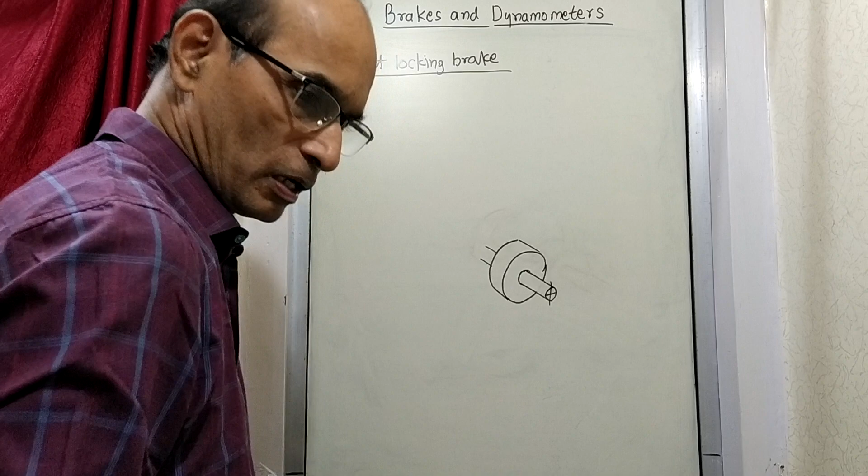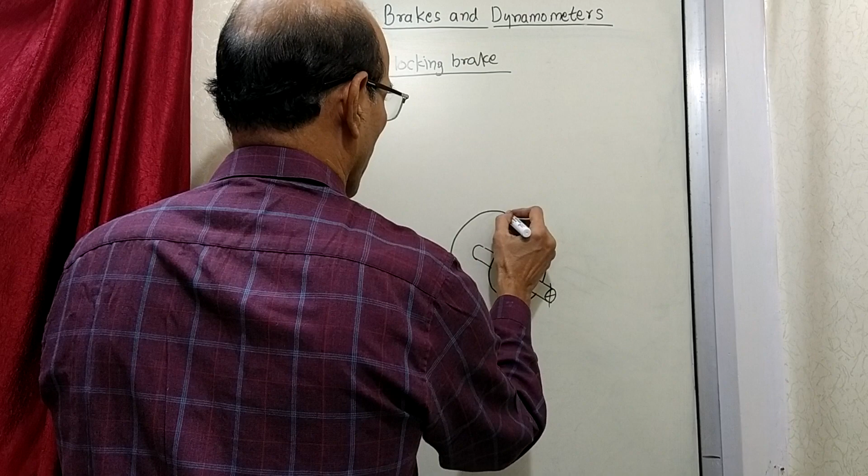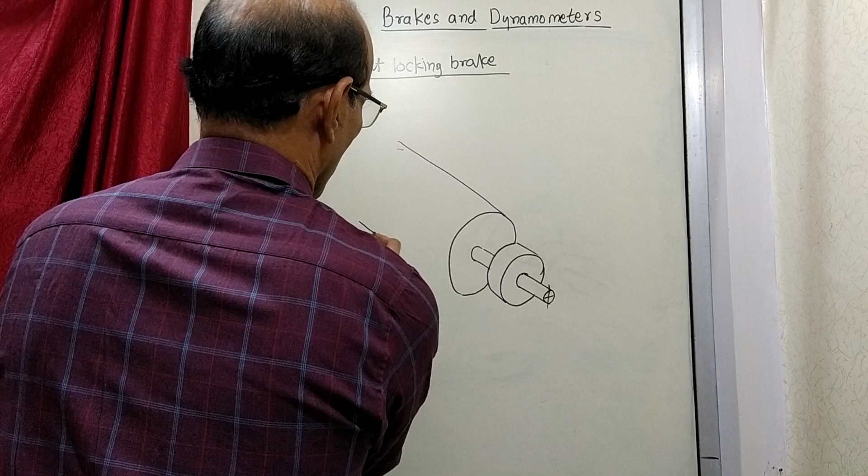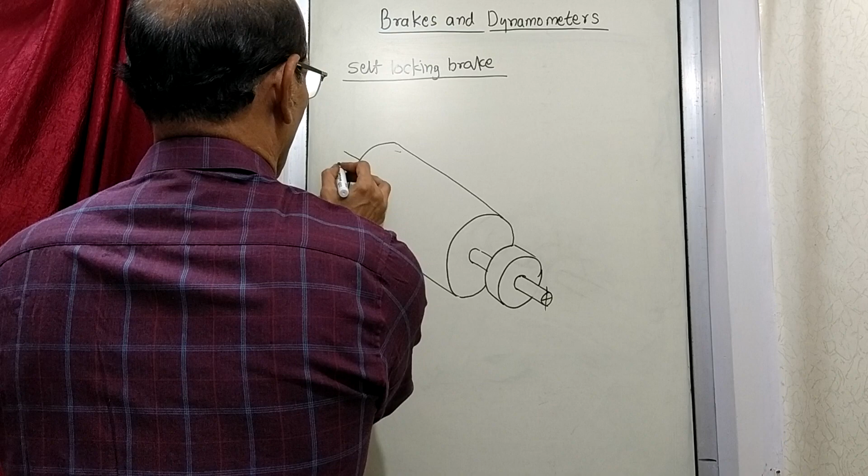There is a drum, and after this drum we are going to draw a figure like this. Some support is here, and on this side here there is a shoe.

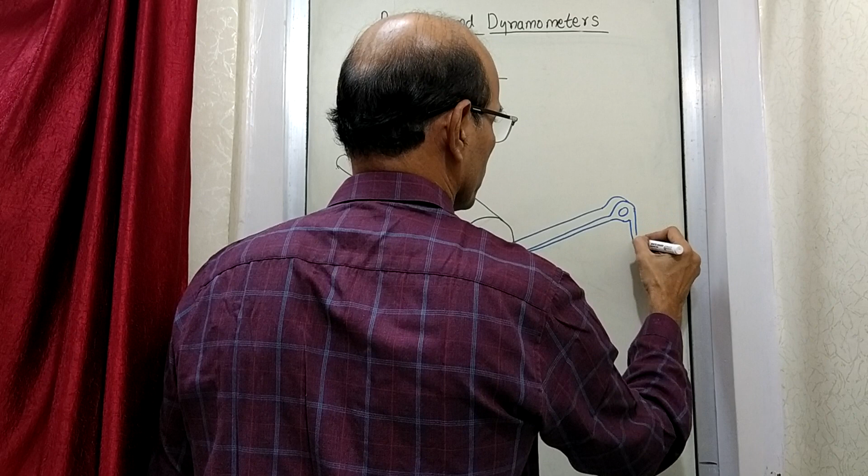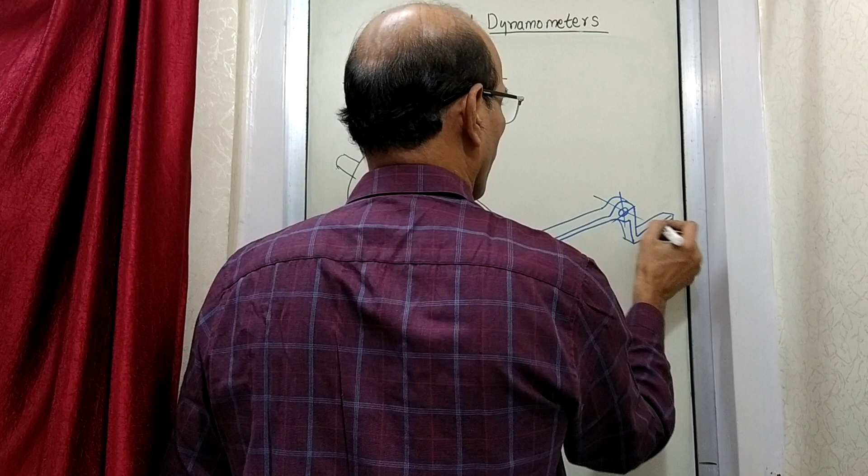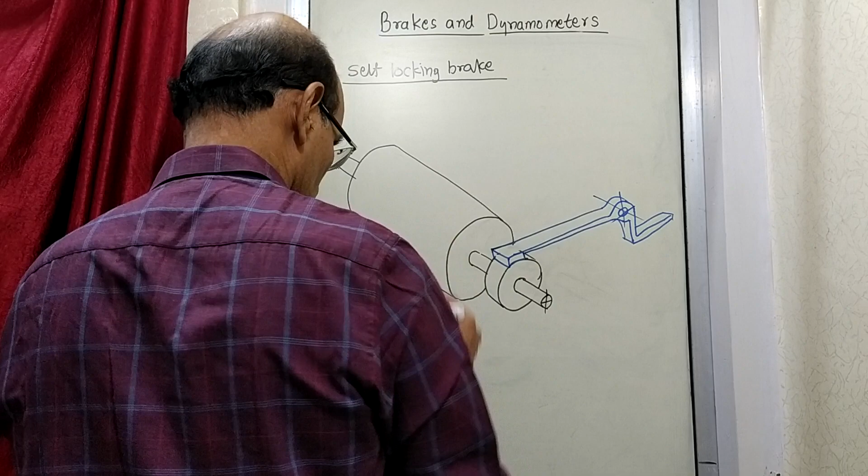So what you now see is here there is a drum, and on this drum there is a rope that is wound here.

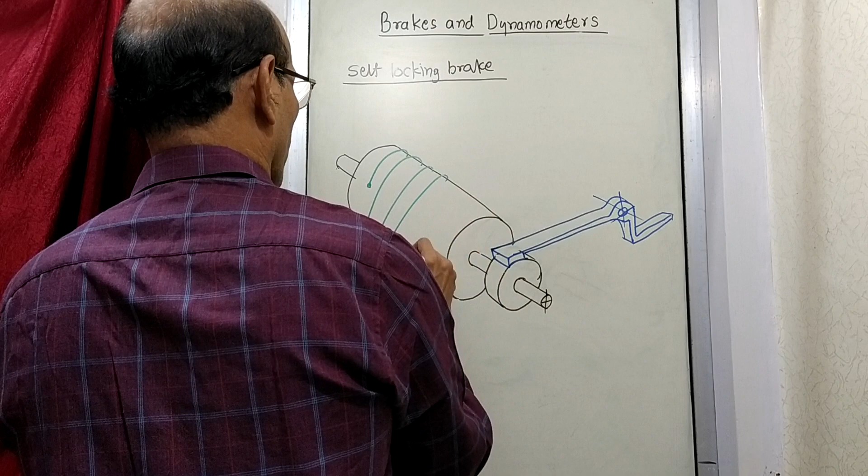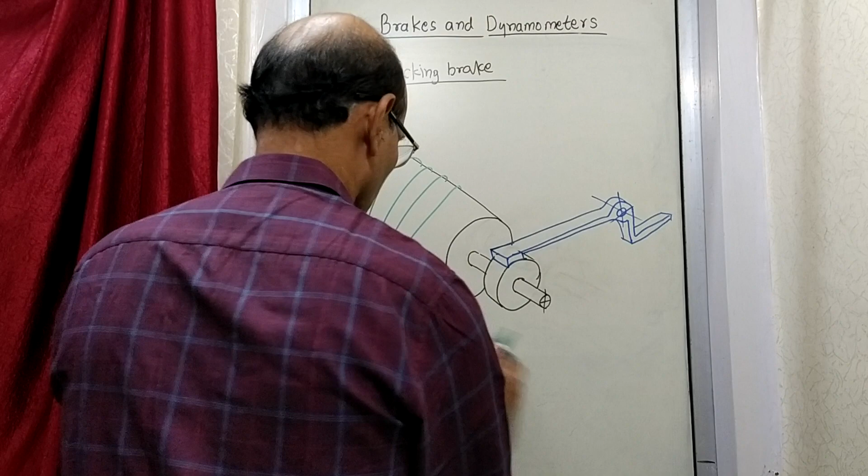And this place here, there is some object. Then this is supported somewhere - it has to be supported. So I am just showing a support like this, just as a convention.

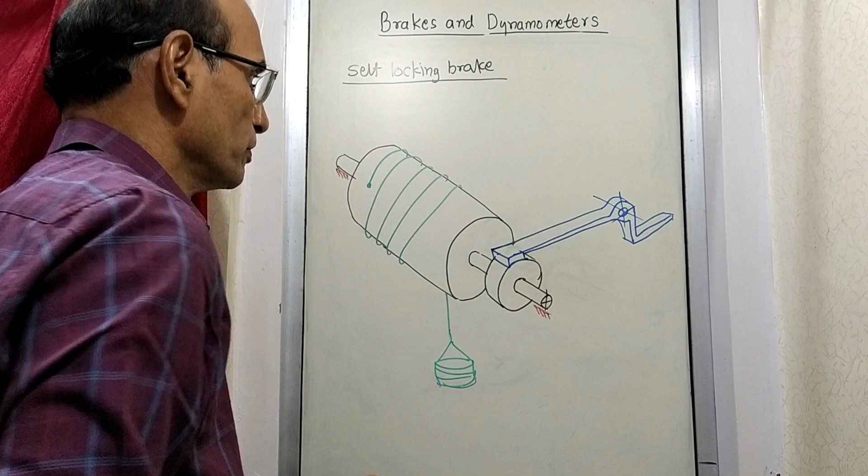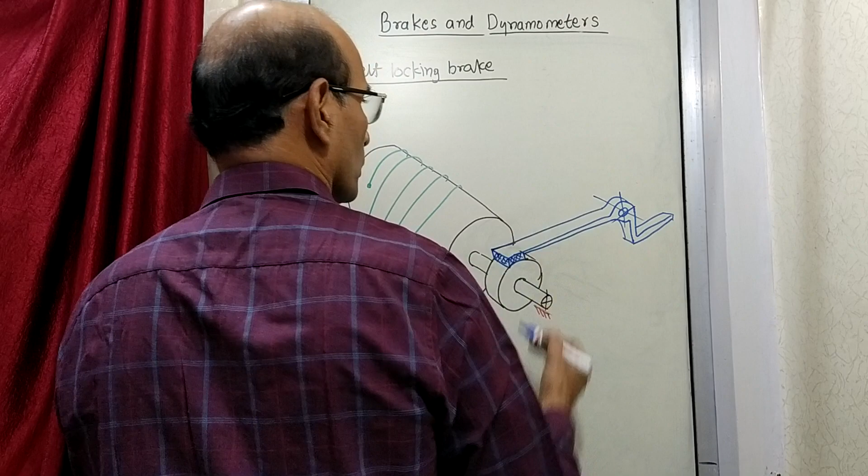This is a brake shoe. Just a simple schematic arrangement, you can say.

So now what you observe here is that there is a drum. On this drum there is a rope wound, and at the end of the rope there is some weight.

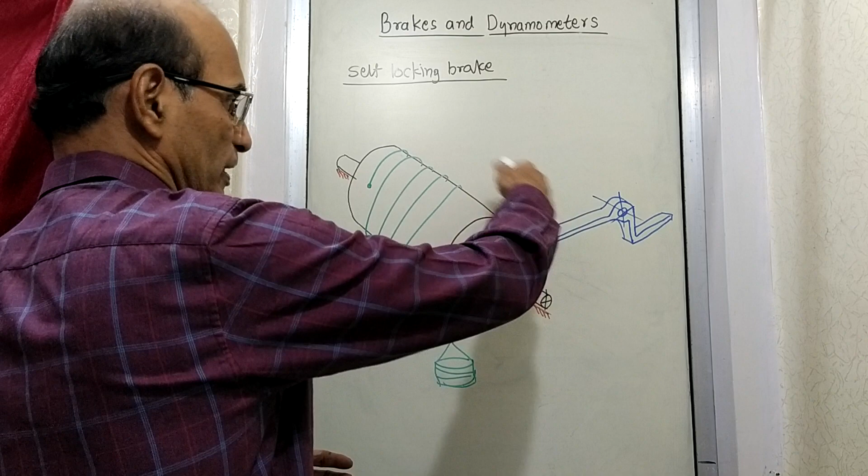Now imagine that you want to lift this weight up. So what is done is, by some method we are rotating like this, and as a result of rotation the drum is rotating this way and the weight is lifted up.

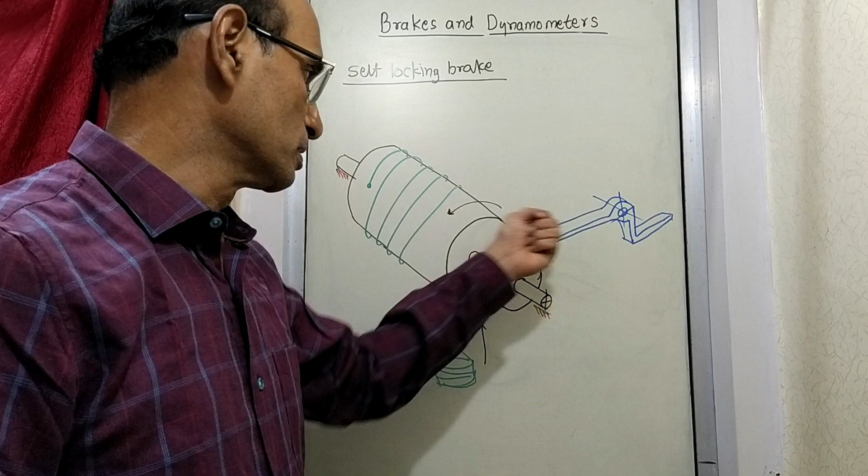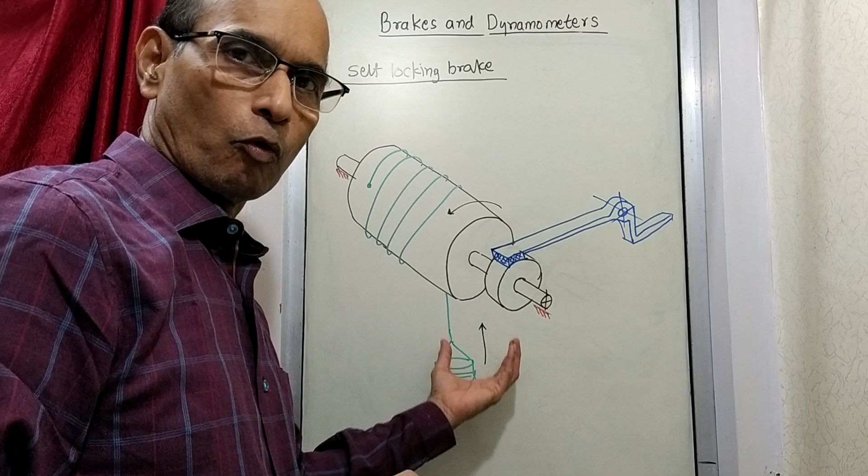Now suppose whatever is the method or handle you are rotating, suppose for some reason you release your hand, then what will happen? The weight, because the weight is on this side, will start falling down on its own, and this will start rotating in the backward direction. So weight will come down, this will go like this.

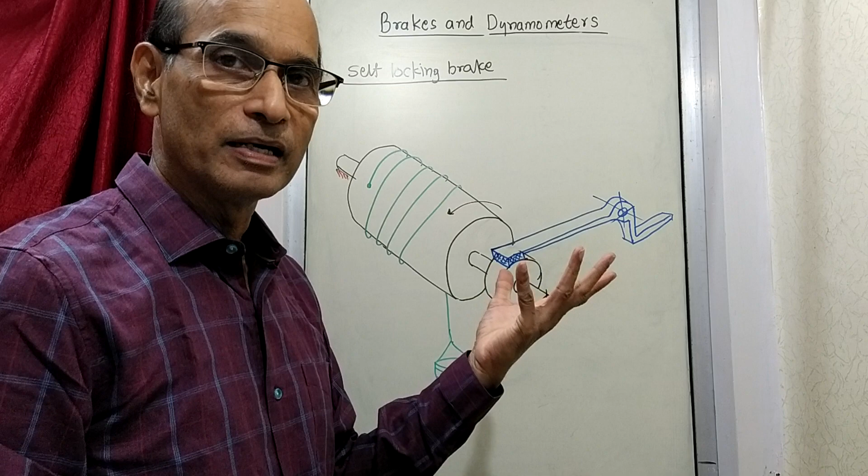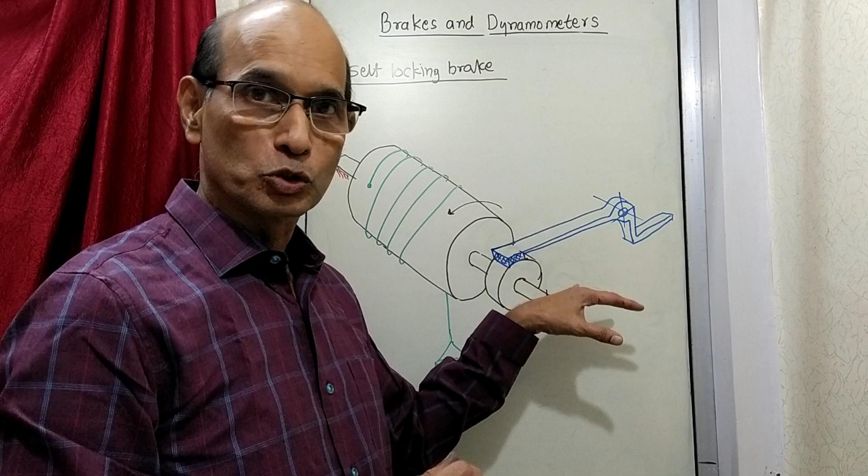And what we want to happen here is that even if you stop lifting it up - now I am lifting it up in this direction, suppose I release my hand, still I want this to remain in the lifted position. I don't want it to go down. Now in such a situation we want the brake to be applied immediately on its own, without us doing anything.

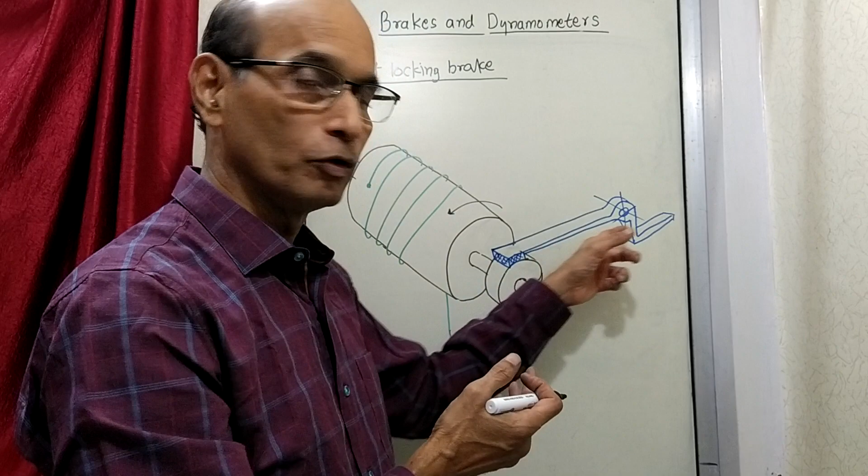That means even with P equal to 0, still the brake should be applied. And who is going to apply the brake? The frictional force is going to apply the brake. How that is going to happen is what is shown over here. So if you see the figure, the way it is drawn...

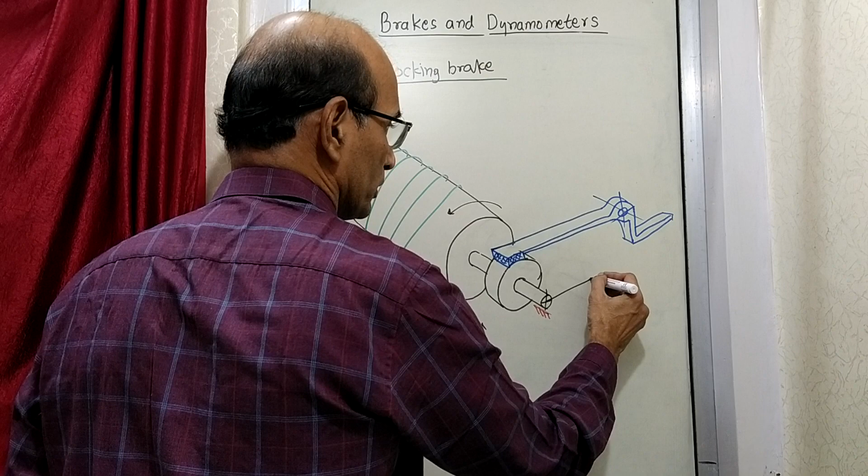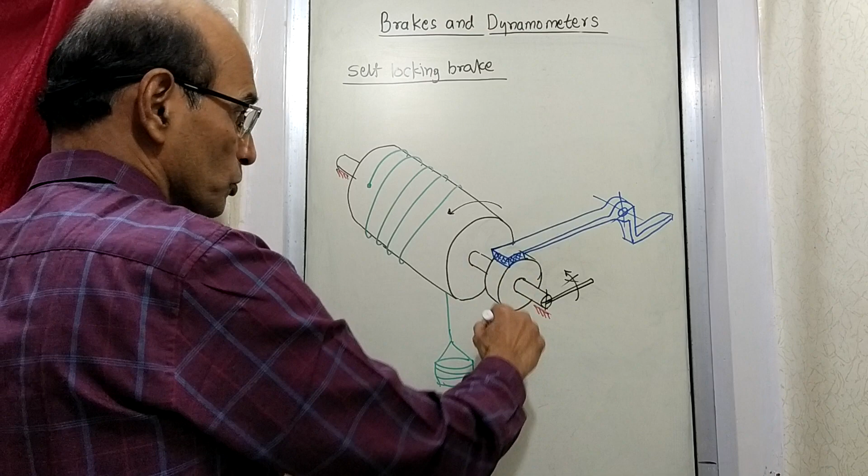This is, you can say, suppose I draw this handle like this, and this handle you are rotating like this for the purpose of lifting - it is lifting up. Now you release the handle, so it had started going down. So when it starts going down, the first thing that will happen is this will rotate this way.

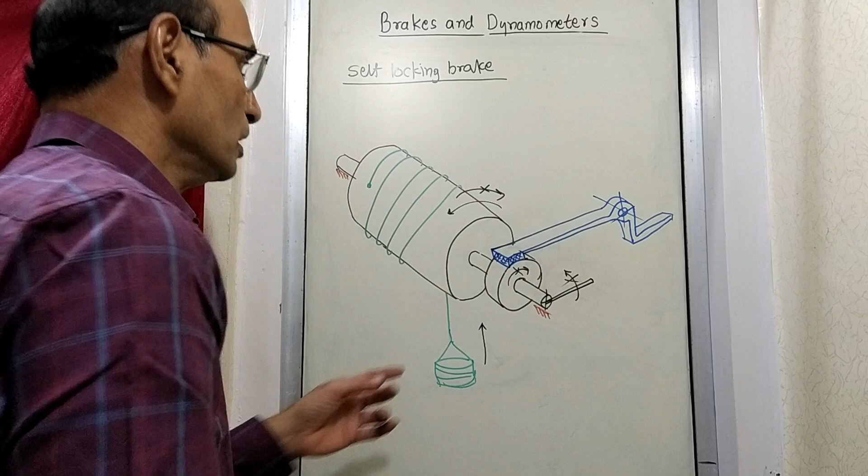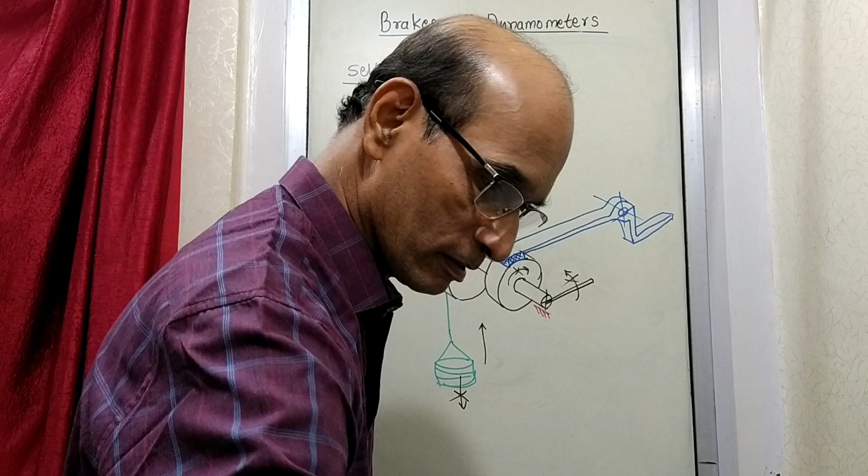The drum will rotate in the clockwise direction. Now we don't want this to rotate in the clockwise direction, because if it rotates clockwise, then the weight will go down, and this weight going down we don't want. So here what happens - the moment the drum starts rotating like this, the frictional force which is present here will come into play.

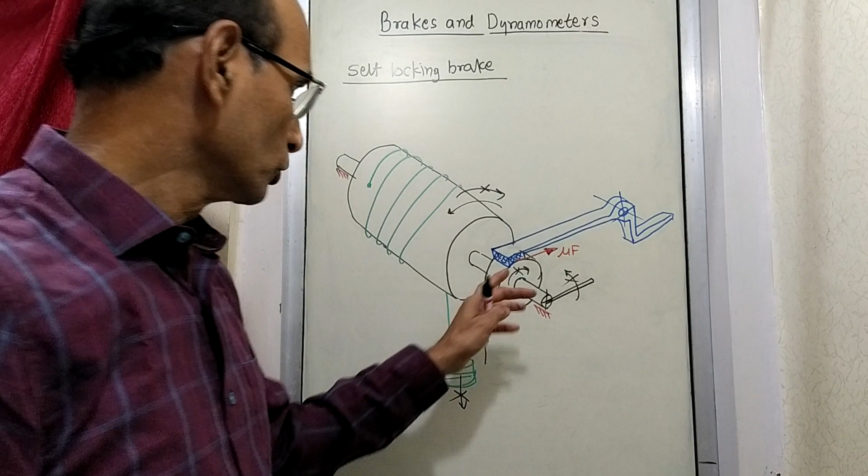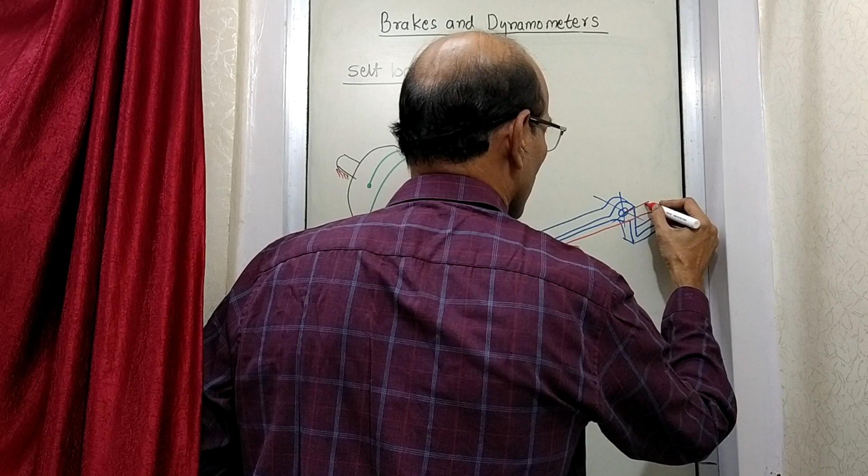So like last time we have shown mu into F. So this mu F in this direction will be acting on the shoe. Shoe means lever. So the moment mu F is acting here, this mu F is at a certain distance - you can see here, like last time, mu F is at certain distance A.

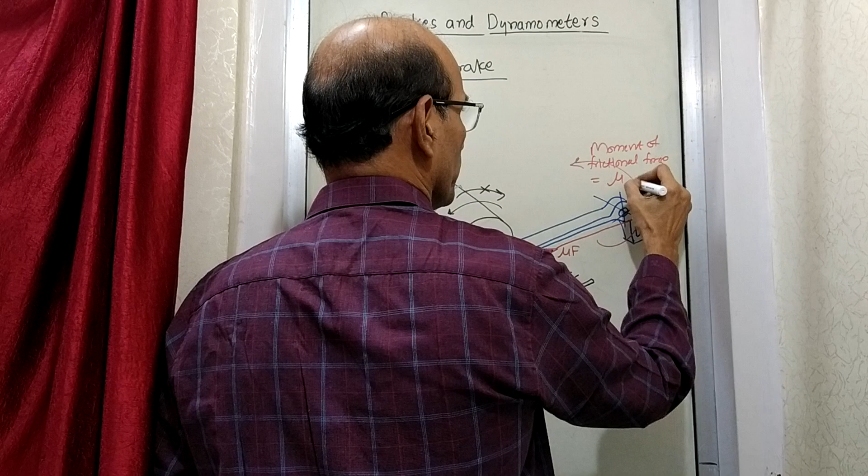So mu F into A is the moment created in this direction. This is a moment of frictional force, and this is equal to mu into F into A, that is the moment created in the opposite direction like this.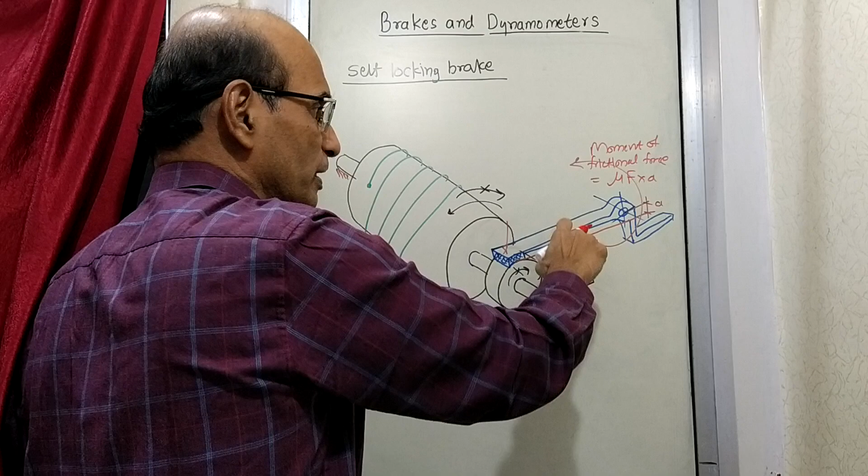This is causing further pressure, so it's further pushed down. When this is pushed down, F is increased, so mu F is again increased, so the moment is further increased.

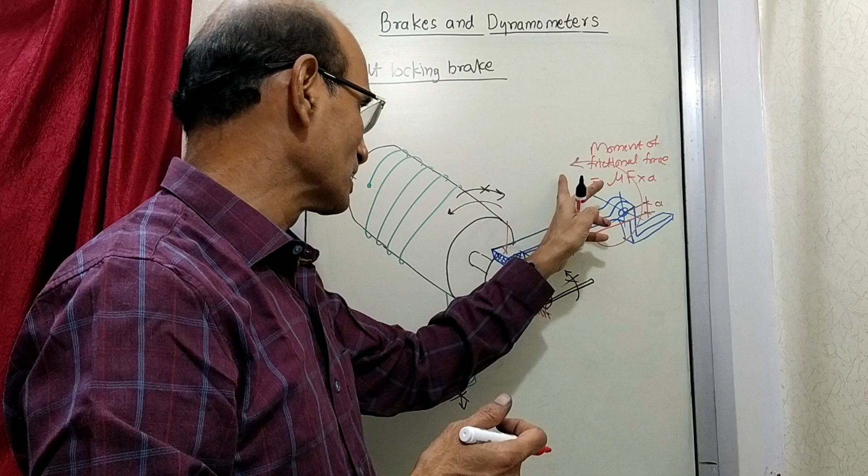So even if a slight contact is there, once the direction changes, this will go on piling up, and this mu F will cause a moment which will increase F, which will increase mu F, which will increase the moment, which will increase F.

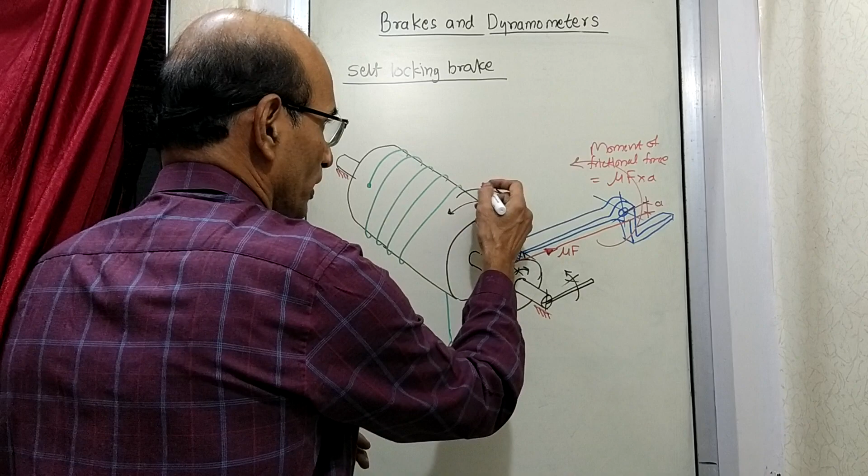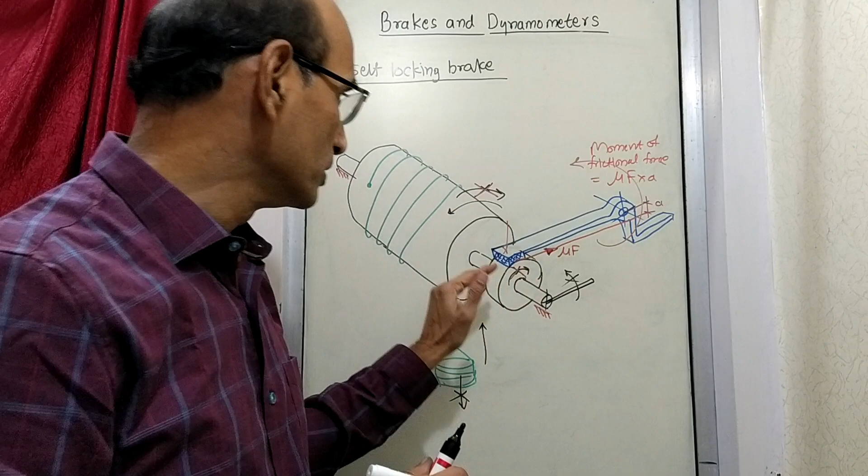So this will go on happening, and immediately the brake is applied. In other words, it will not rotate in this direction at all. Even if you are lifting it up, even if you leave your hand, the reverse motion which you don't want will immediately apply the brake, and this is called self-locking.

Now if you want this to really come down purposely, you have to lift this contact. So this part of the handle is given only for pulling down, so that this contact will break and allow it to go down if you want. But on its own it will not go down; you have to just lift this up.

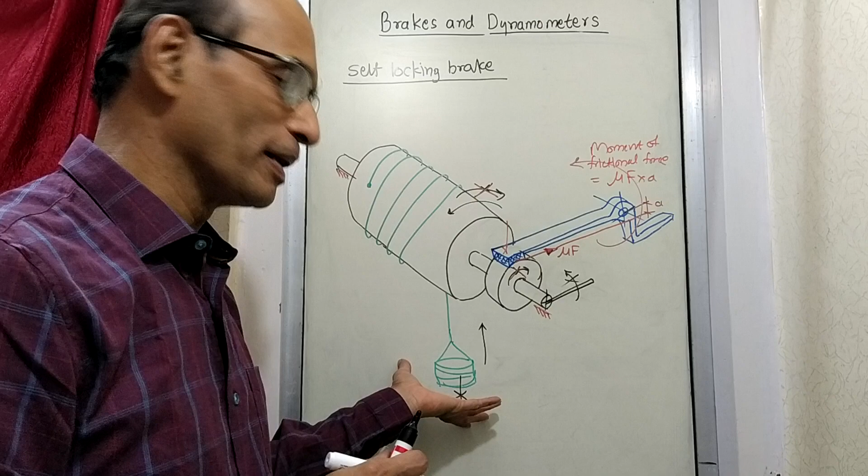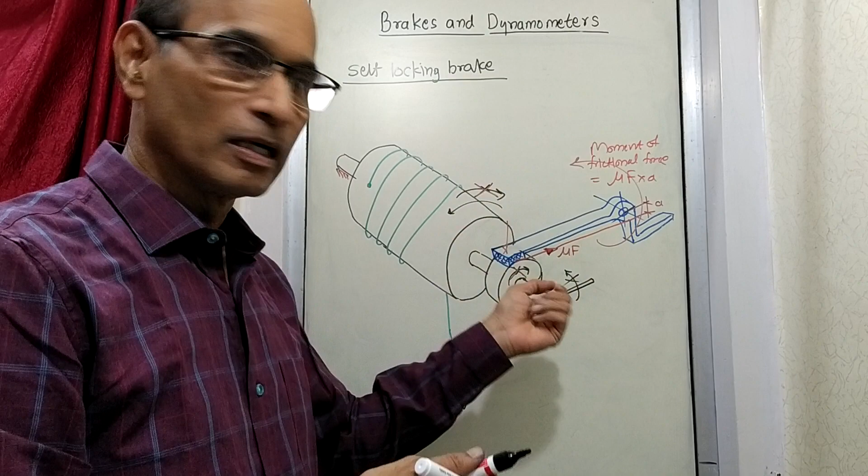Suppose this is some device for lifting weights from the ground floor to, let's say, the 4th floor. So this arrangement is made there. You started lifting like this, the object you want to carry up is coming up, and once it comes up, you don't want to hold this in position.

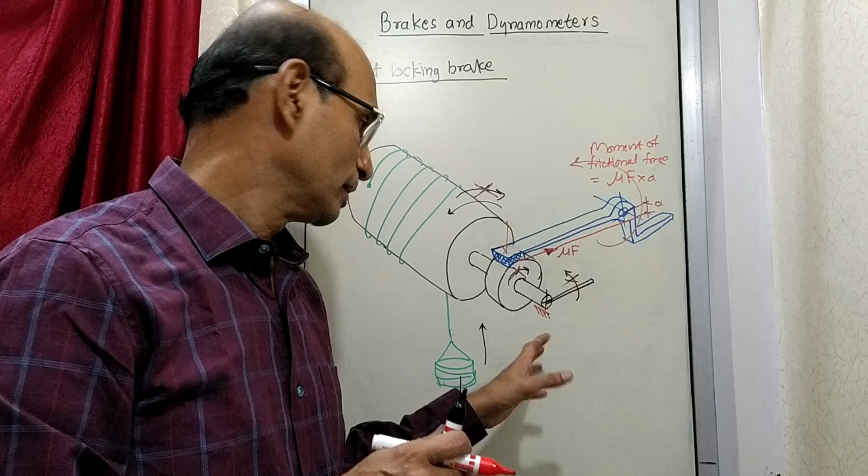You just leave your hand, nothing will happen, and this object can be brought out. Once this is brought out, everything is fine. Now you want to shift this basket down again for lifting the next lot, so at that time you have to release the contact so that this will go down.

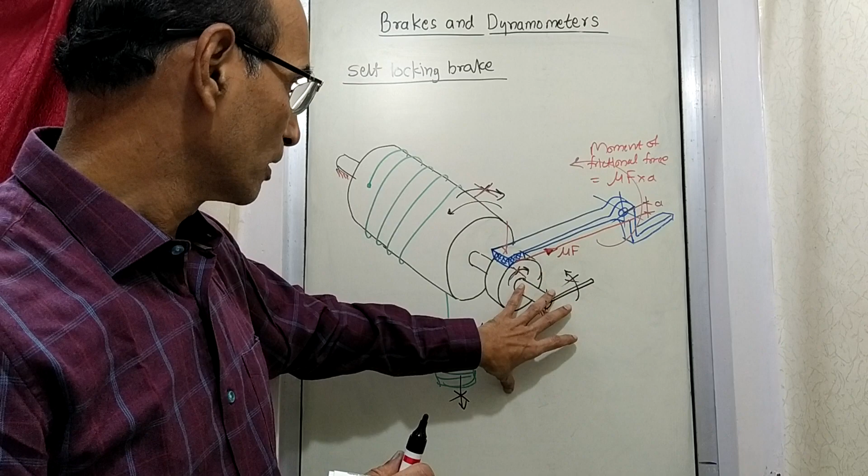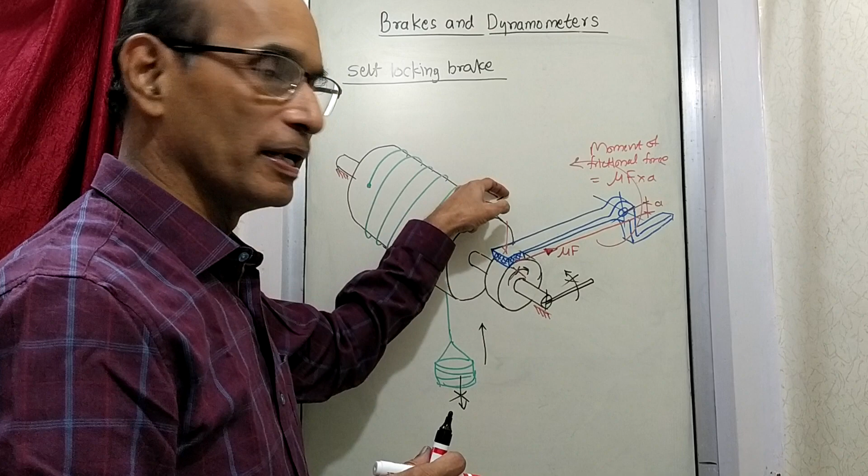So this is an example of a self-locking brake applied here, and this is some kind of safety operation, where the drum will rotate only in one direction. In the opposite direction it cannot rotate because of the self-locking condition.

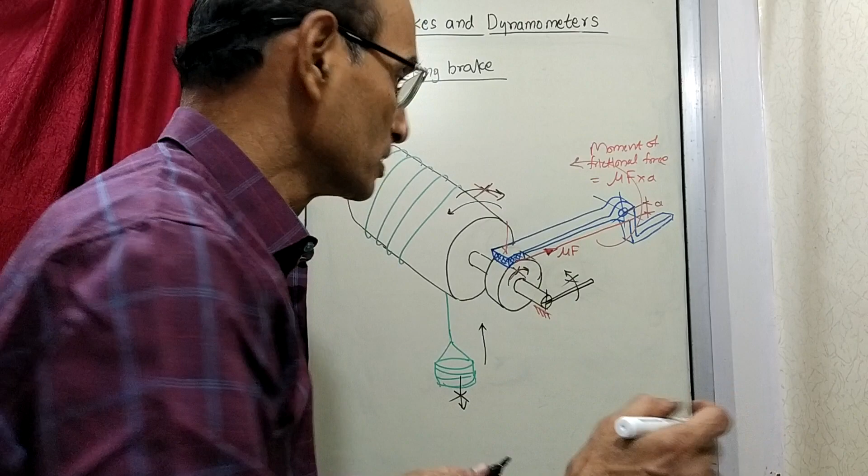So this is an application of case number 2 which we have learned, and the theory behind case number 2 tells us that in a peculiar situation, if the dimension... when this happens, as per the condition we wrote last time, only then this happens, it doesn't happen on its own. So that condition I'll just repeat: x equal to mu into A.

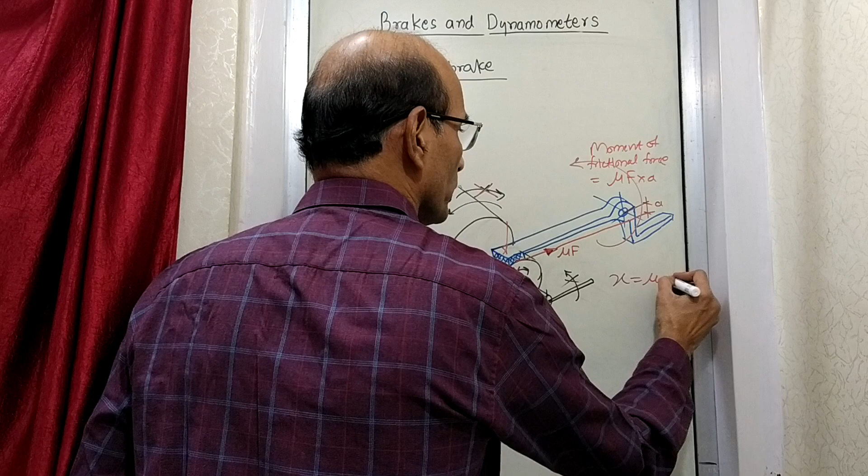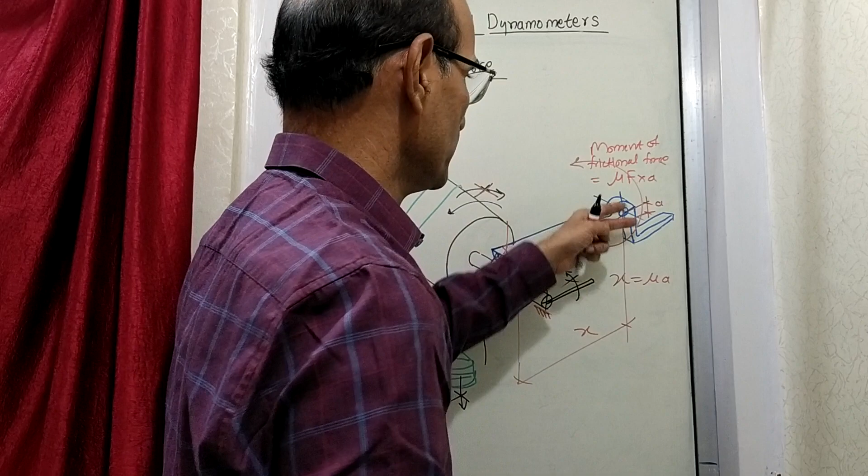X equal to mu into A. So certain distances are such, x is a certain distance, say in this case this is x, and this is A. So if x is equal to mu A, if the design is such that x is equal to mu A, then self-energizing or self-locking will take place, which we have seen last time. So this is the application of that particular theory.

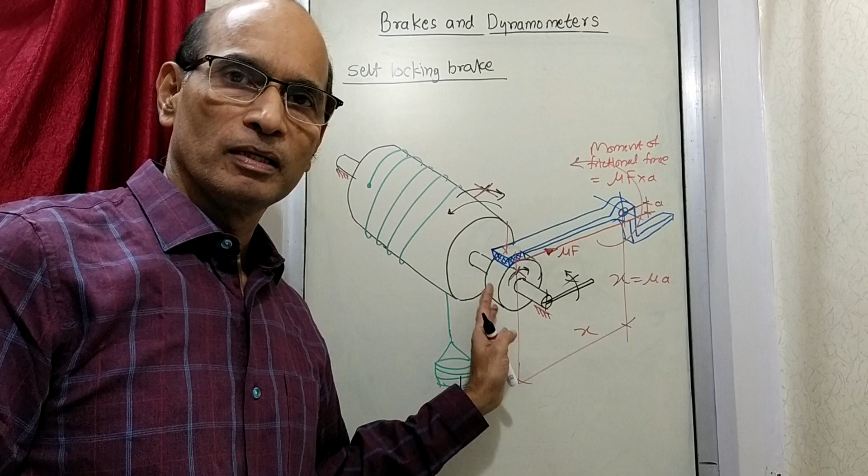So just make a nice note of this so that you will understand this concept very well. Next is case number 3, which we will take up after some time.